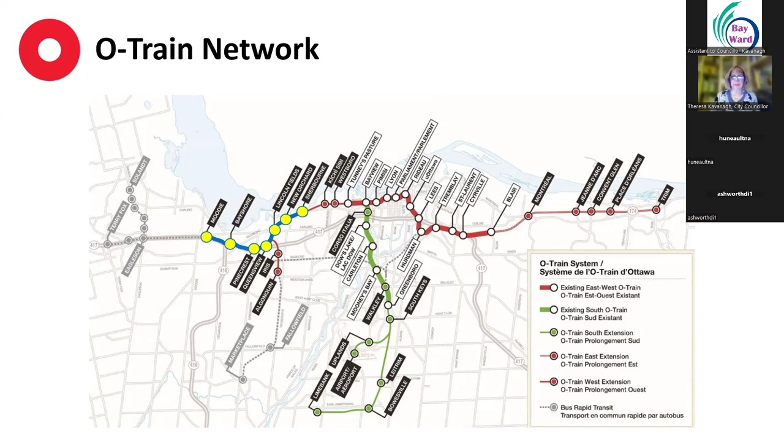Our agenda for this evening: we're going to go through a Ward 7 construction update. We have some new photos as well as some update notes with regards to station construction. We'll touch on the Highway 417 westbound on-ramp closure at Pinecrest, the 75 Cleary deep utility works, Kichi Zībī Mīkan work, the Richmond Cut and Cover Tunnel, as well as the Richmond Complete Streets project. And at the end, we will also have a slide again with that contact email.

Right now, our LRT station construction will continue in Ward 7 throughout 2024, with some stations nearing completion by the end of the year, which is very exciting.

The light maintenance and storage facility is about 99% complete. Moodie Station is at 86%, Bayshore at 57%, Pinecrest at 92%, Queensview Station 74%, Lincoln Fields 95%, New Orchard Station at 45%, and Sherbourne Station at 38%. So we're coming to completion on a few of those stations. I'm sure all of you living around the areas have been able to see that work taking place and coming to a close.

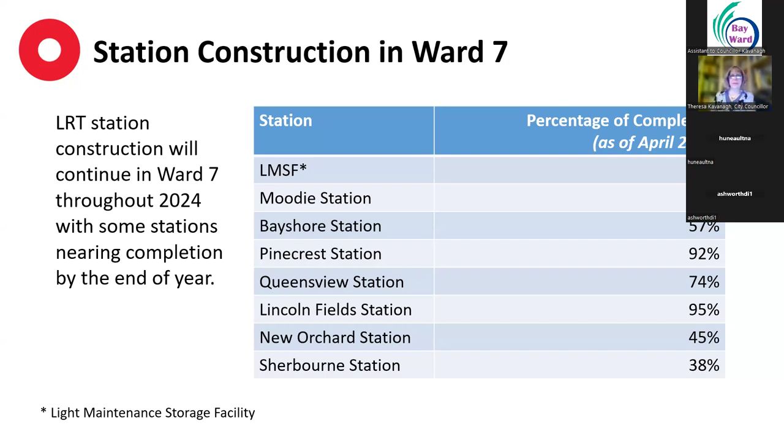For our light maintenance and storage facility, testing and commissioning of the building at the LMSF is in progress.

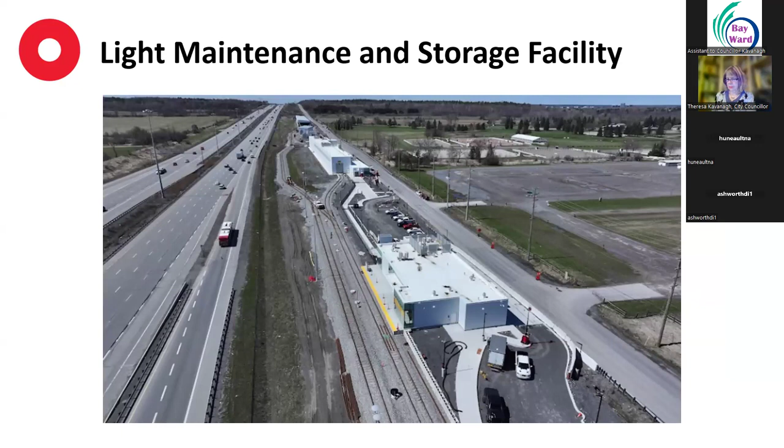For Moodie Station, the mechanical and electrical finishes, room finishes, elevator installation, concourse and ceiling installation is still ongoing, but there's definitely been some great progress.

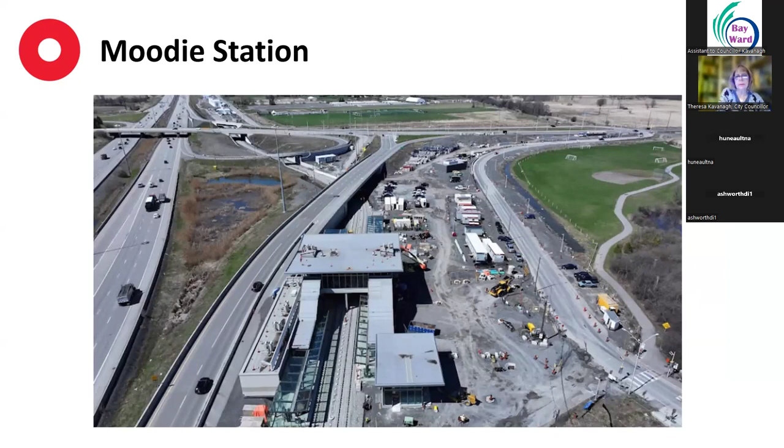For Bayshore Station, we have construction of the foundation wall at the center station building, concrete foundation work at the South Station building is currently ongoing. Framing and insulation installation for the northeast concourse rooms is nearing completion, and work on the pedestrian tunnel continues.

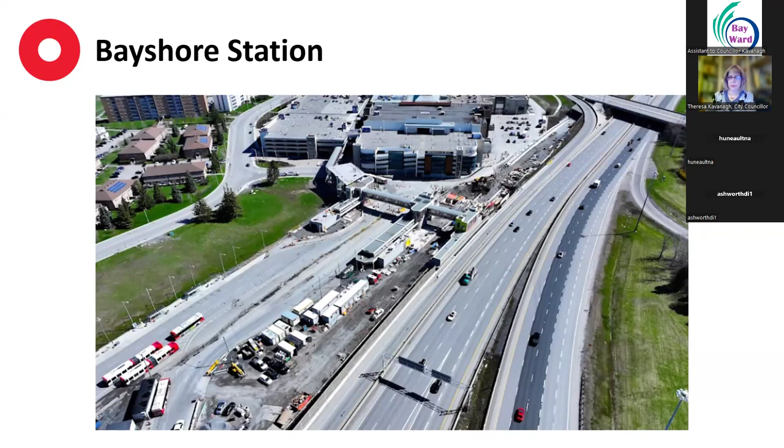For Pinecrest Station, the elevator shroud installation is taking place, signage installation, service riser installation, as well as mechanical and electrical finishing work is ongoing.

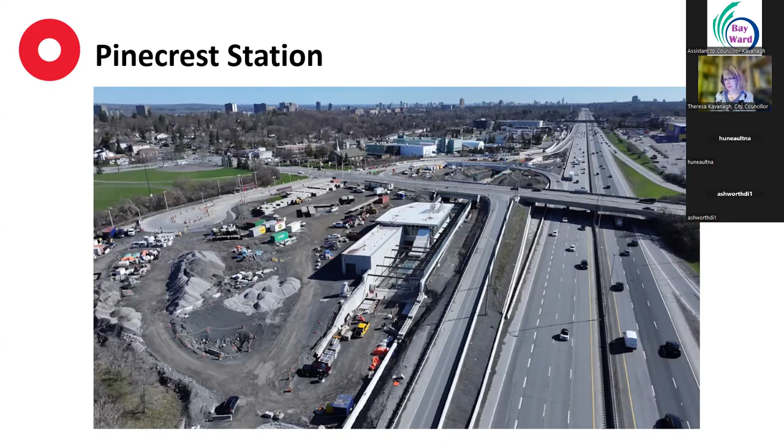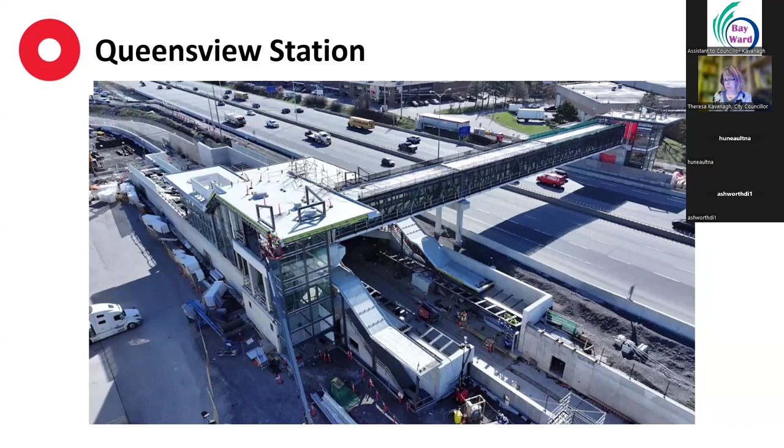At Queensview Station, installation of insulation and drywall at the Queensview Station North building, along with construction of the exterior walls, continues. The concourse glazing is ongoing, and curtain wall support installation and mechanical and electrical finishes for Queensview Pedestrian Bridge is continuing.

At Lincoln Fields Station, interior finishes at the platform level and signage installation continue. Electrical panel installation along with installation of handrails at the end of the platform stairwell is complete.

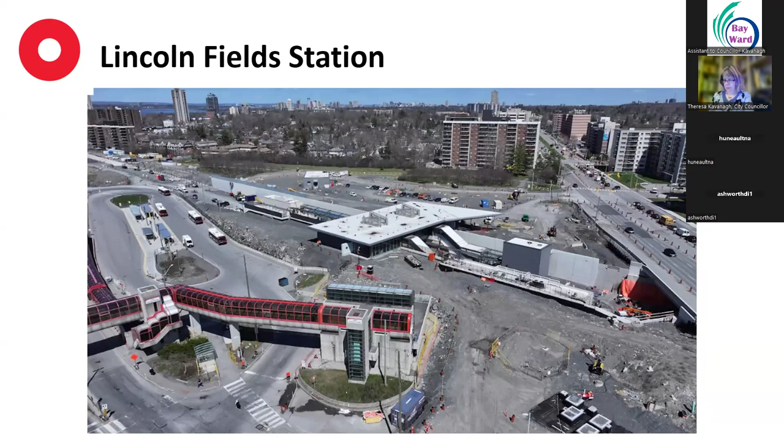For New Orchard Station, structural steel erection for the East Concourse is complete, and is underway for the West Concourse. Work on the West Concourse roof has started.

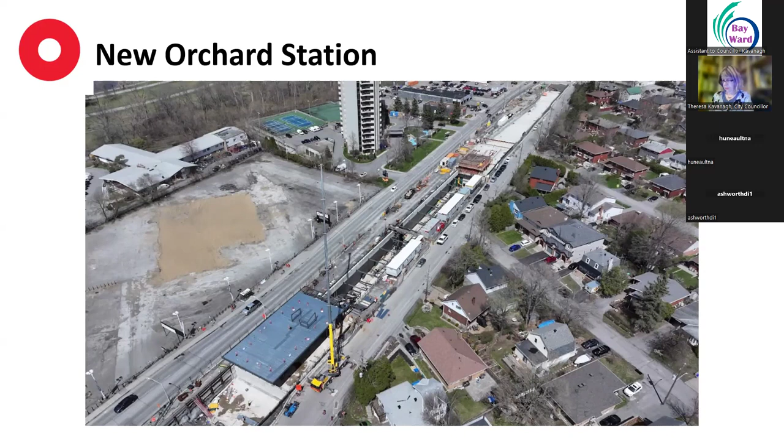For Sherbourne Station, concrete work for the West Station and East Station platform walls is now complete, and work on the stairwells and concourse slabs continues.

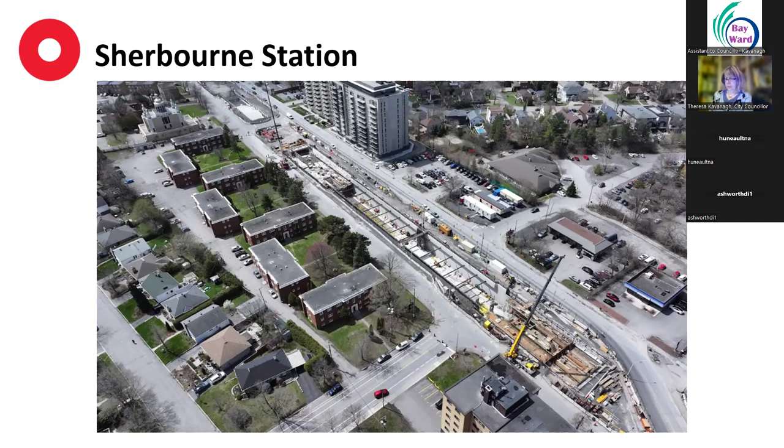Just to make note, for all the photos presented, those were taken in April of 2024. So they are a fairly recent look at work that is ongoing and the status of the stations. However, reminding that it is May, some work might be a little bit more complete than when these photos were taken.

Now we're going to touch on the Highway 417 westbound on-ramp closure at Pinecrest. To complete construction of the permanent roadworks and the segment of the LRT guideway at Pinecrest Road, the westbound Highway 417 on-ramp from northbound Pinecrest Road, which closed on Monday, May 13th, is expected to reopen in early August. Once completed, the northwest ramp may be closed temporarily, and a public notice will be distributed in advance of that temporary closure.

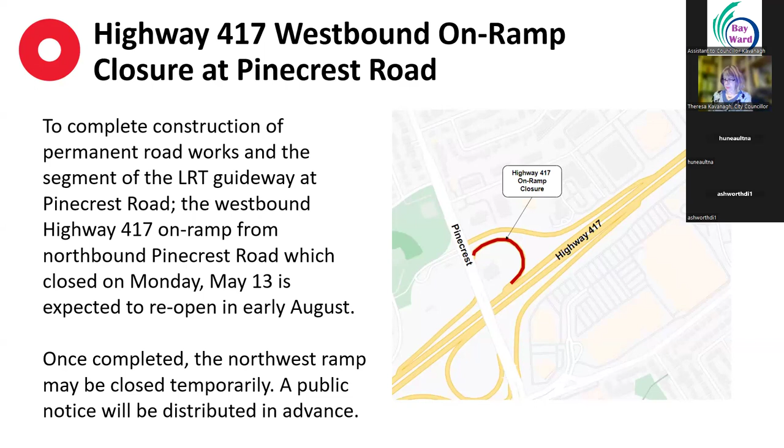For 75 Cleary, the deep utility works from May to fall 2024: utility work to the east of 75 Cleary Avenue involving deep excavation, replacement of water main, storm and sanitary sewer infrastructure will take place. As early as October 2024, the temporary detour through the old Kristy's restaurant parking lot will permanently close. Just to note, in the picture, the highlighted box shows the area requiring those deep utility works.

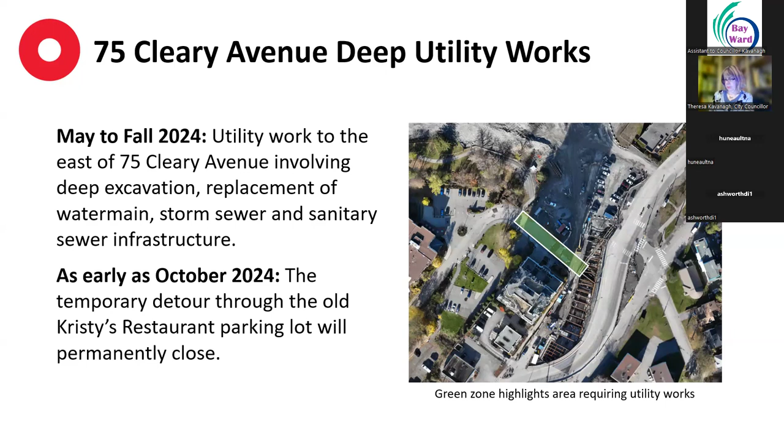The Kichi Zìbì Mìkan, so in May and June, there will be backfilling of the tunnel along the KZM. For 2024 and 2025, construction of the permanent configuration of the KZM will be taking place. And this summer, 2024, construction of the Cleary pedestrian underpass will be continuing.

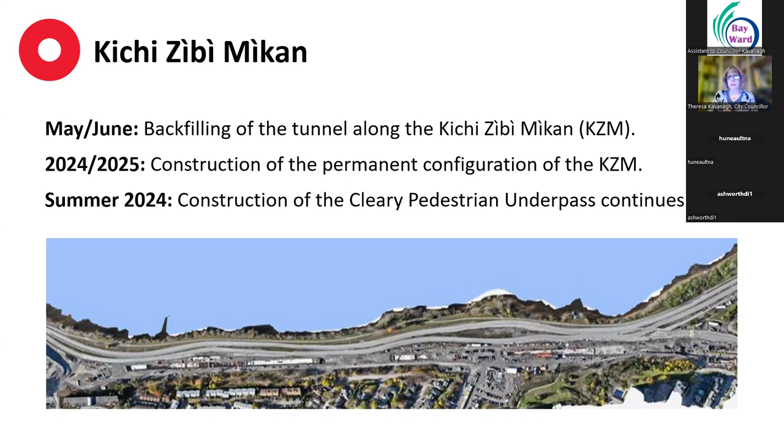For the Richmond Byron cut and cover tunnel, we're looking ahead to June 2024, which is shockingly only in a few days. Tunnel construction along Richmond and Byron will near completion, and once completed, tunnel backfilling will commence.

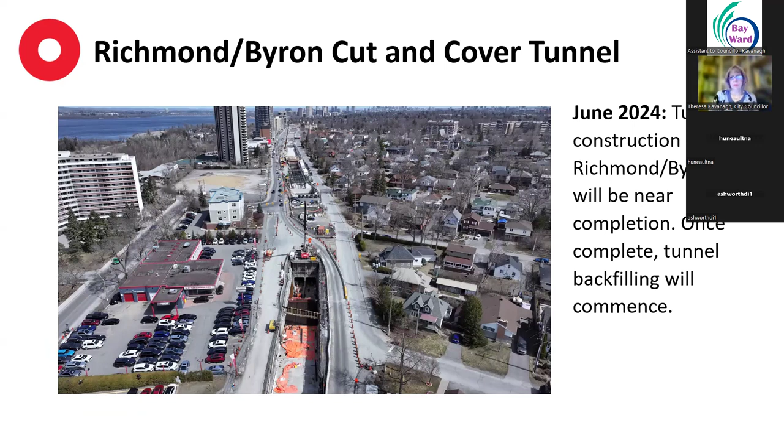Touching on the Richmond Road Complete Streets project, preliminary work is expected to begin this year between the east side of the bridge over the KZM and just west of Cleary Avenue. The multi-year project will involve backfilling of the LRT tunnel in the area, final paving of Richmond Road and Byron Avenue, construction of curbs, sidewalks, bus platforms and shelters, raised pedestrian crossings, segregated bike lanes, installation of street lighting, traffic signals and signage, tree planting, landscaping, and property reinstatement.

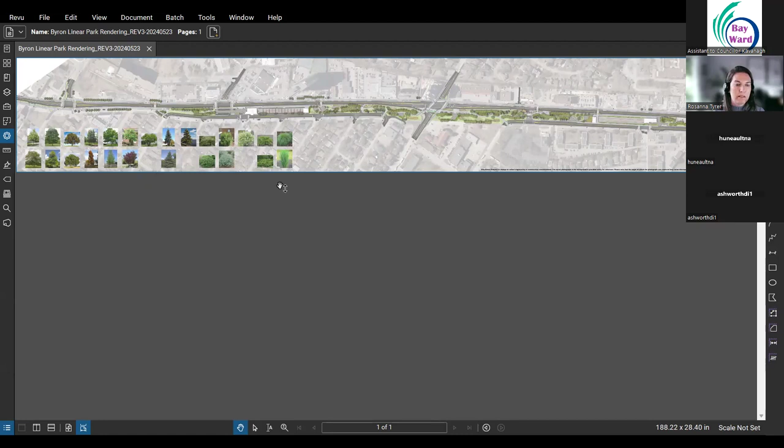In addition, you can't really see it on my screen, but there is a little disclaimer. I will note that this is overlaid on an aerial. The way in which aerials are taken, sometimes they're taken at an angle from above. So you may notice things, for example, here where it looks like a driveway doesn't quite line up with the existing driveway. I can assure you that this driveway will, on site, line up properly. So just keep that in mind when you're looking at whether or not some of these edges line up exactly with what you see underneath. It's more or less just to help reference where everybody is.

So to start, I'm going to start backwards. Essentially, I'm going to go west to east. So throughout the entire corridor, we're going to have separated cycle facilities and sidewalks. If I zoom right in here, you can see the sidewalks are denoted with this gray-like hatching, whereas the cycle facilities are between the road and the sidewalks, denoted by the cycling nomenclature pavement markings.

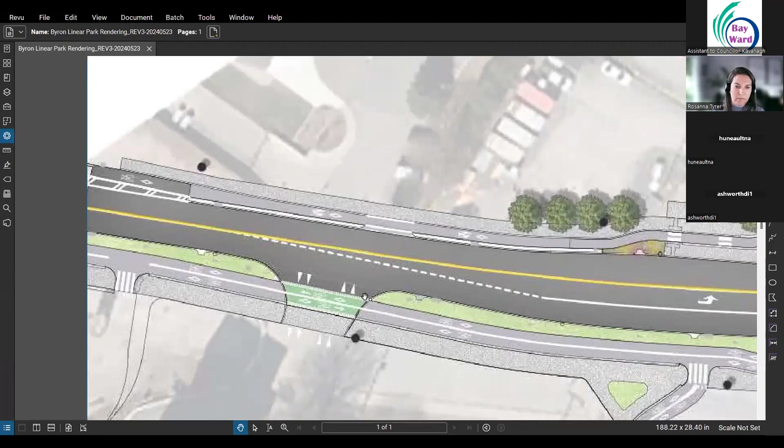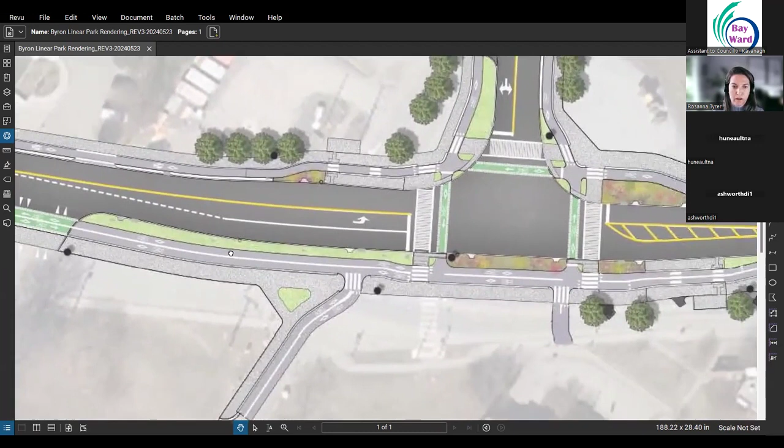Right here we will have the access to the Lincoln Fields area, the MUP that goes into there. We have our 1190 friends with their new aligned access, as well as the 1195 on top, their access will be reinstated to Richmond Road. You can see here we get to Edgeworth. Edgeworth will remain closed and have a tie-in for both pedestrian and cycling facilities.

At McEwen itself, the final alignment will be pretty much in between where it was a few weeks ago and where it is now. So we are in the process of getting all the underground infrastructure in for that. The cycling and pedestrian facilities will tie into the existing, as well as the cycle facilities will have an on and off road transition between McEwen.

So at the intersection, you can see that the cycling facilities will have its own dedicated crossing, as well as the pedestrians. We will be having bus stops with bus pads at various locations throughout this project. For this particular intersection, you'll have one on the far side, on the northwest corner, and then one on the southeast corner for the opposite direction.

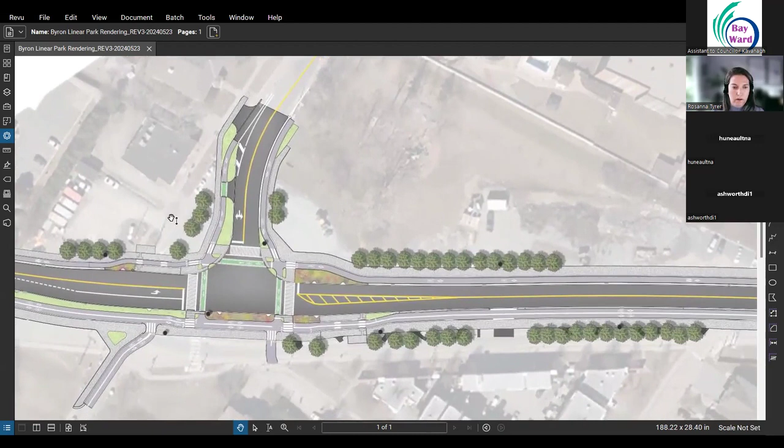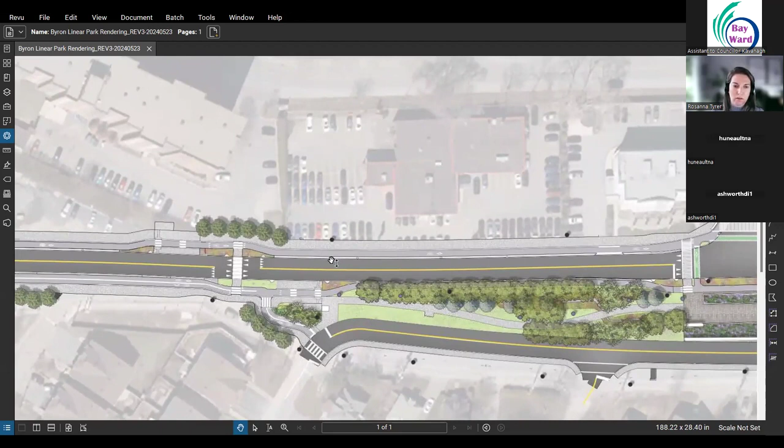As you can see through this area, we have some driveways and then the tree reinstatement along the way. Once we get past, this is one of the Ambleside apartment complexes and the used car dealership. There will be a raised pedestrian crossing, which we've had in the past.

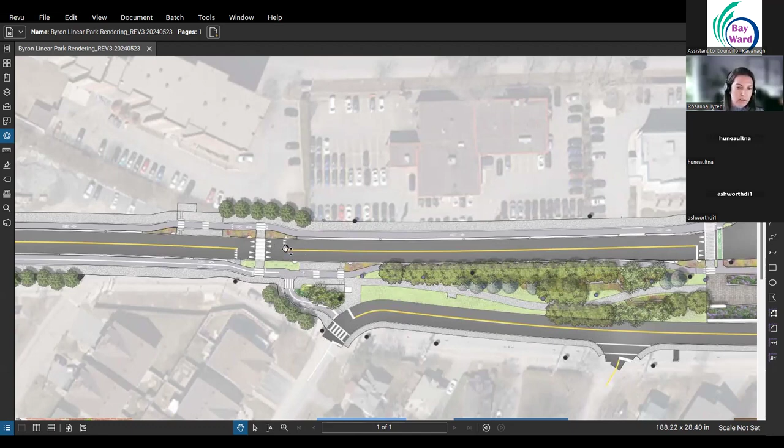I want to bring attention to these, we call them shark teeth. These little triangular pavement markings denote a raised crossing. You will see that at a few of the intersections as well as some of the raised crossings through here. So at Hartley, the crossing will be raised.

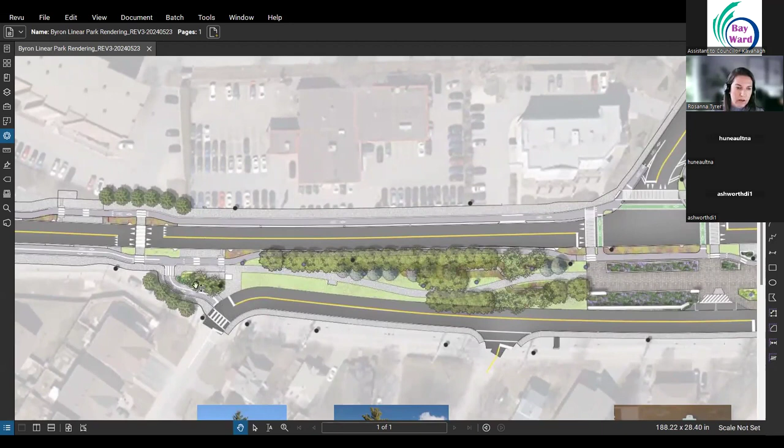The other big change to this area is that the connection from Richmond to Richardson is being removed. There will be facilities to take people to Richardson Byron to get them down onto that road. Otherwise, they can continue on through to the station. So this intersection is...

the New Orchard intersection along with New Orchard Station. We will be reinstating the road up New Orchard. We'll be doing the same form of treatment, much like McEwen, where the sidewalks will be attached and the cycling facilities will have the on and off street transitions. It will also have the same treatments for crossings.

The one thing I am going to note for this, once again, we have the shark teeth at this intersection. That is because New Orchard Station will be raised. So this whole intersection, when you come to it, will have you go up and over. It will also be a paver stone intersection, so that between the raised area and the different type of material will have a traffic calming effect.

So on the south leg of this intersection is where the courtyard for the station begins. There will be some on-street bus facilities to capture the local residents coming in and out of the station. There will be all-way stop and some one-way stops along Byron as we go past the station, and on the north side you have your pedestrian and cycling facilities to carry on past.

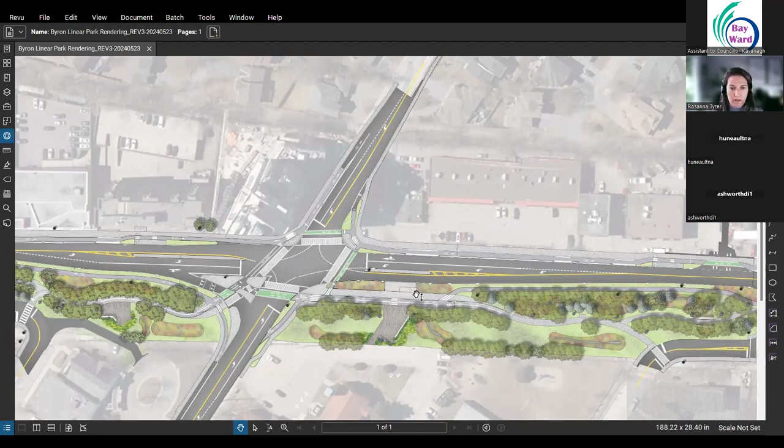When we get to the intersection of Woodroffe and Richmond, again we still have the pedestrian and cycling facilities in their segregated crossings, as well as the north and south legs of Woodroffe having the on-off transitions between the cycling facilities. We have some of the bus stops on either side, pretty close to where they are now.

And then moving further to the east, we move into the Lockhart transition. Similar to both Richardson and Richmond, and Richardson and Byron and Compton, they will turn down with a pedestrian connection through it.

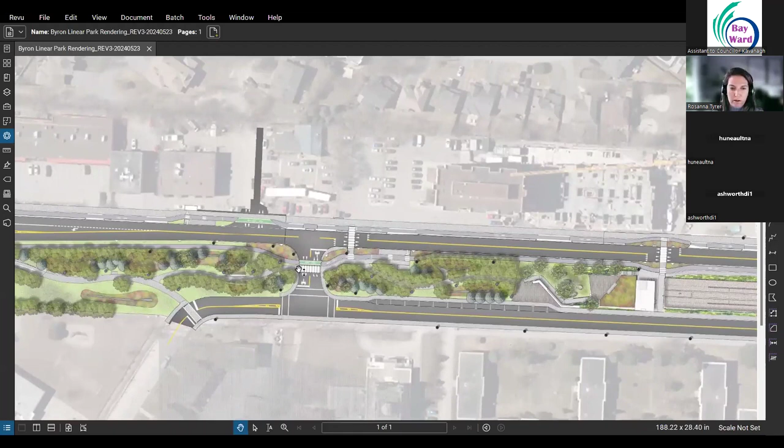We are now here, this is the northern section of Lockhart with the Poolorama. There'll be a bus stop here as well on the other side with another raised crossing, and the crossings between Byron and Richmond will also be raised.

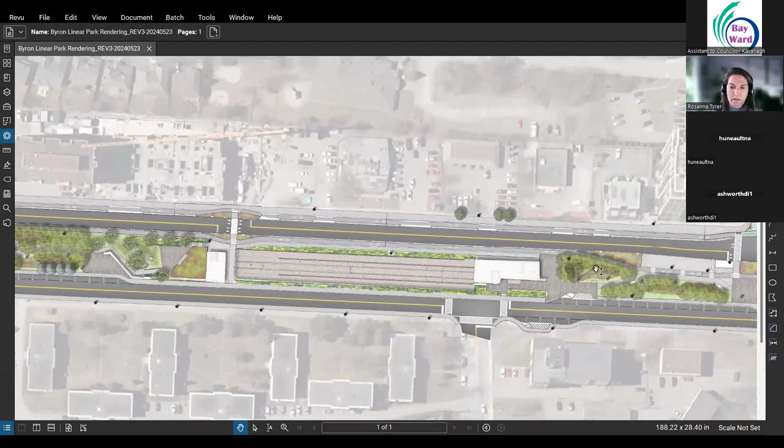As you move further east, this is when we start to get into the Sherbourne station. As you can see here on either side, it has the pavilions and facilities for bikes and pedestrians to move across it on the north side of the station, as well as some amenities on the south. So again, we have the controlled crossings on Byron.

Sherbourne does have the small kiss and ride on either side. These are not anticipated to have high volumes. This would be more or less you and your neighbors dropping off your loved ones on a rainy day kind of scenario, or picking up.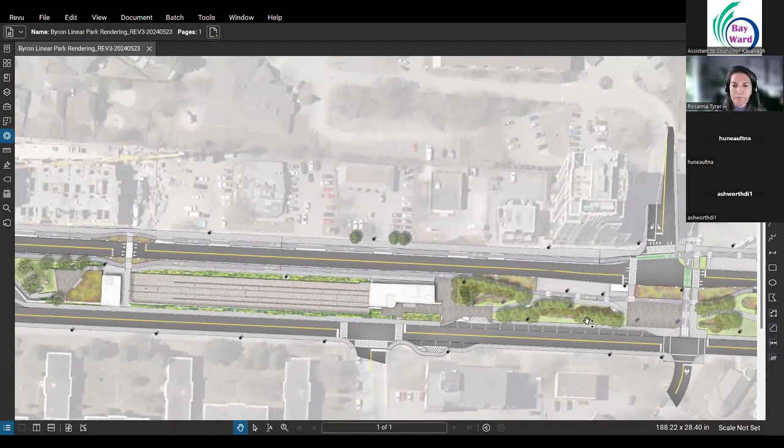So the last leg of this road plan is the Cleary intersection. Cleary intersection will be just like New Orchard, where it is raised, as you can see by the shark teeth, and it will also have the paverstone intersection, which will again add to the calming effect from the visual and vertical changes in the area.

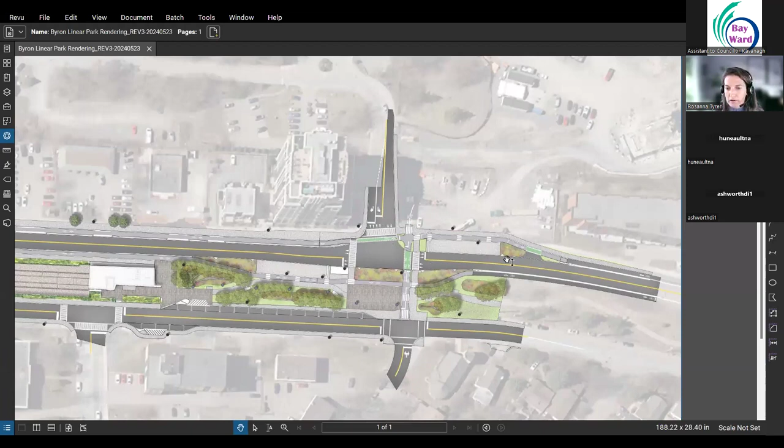We also have again your segregated crossings for the different modes of transportation and your two bus stops on either side. And then it'll continue on and tie into the existing street.

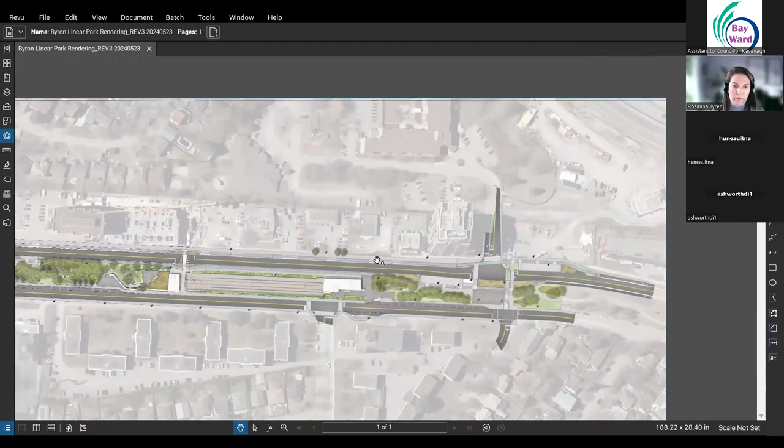I know that's a lot to digest, and these are very small pictures for now. They will be released so everybody can take a moment to check the areas of more particular importance to them. If you see something here, please send us an email through Stage 2. If you can use Clip It or give good directions on exactly what you're looking at, that'll help a long way. Otherwise, I'm always welcoming one-on-one video chats where I can sit and walk you through in a smaller group.

With that, I had the chat hidden, so I'm not sure what has popped up. Where did we go?

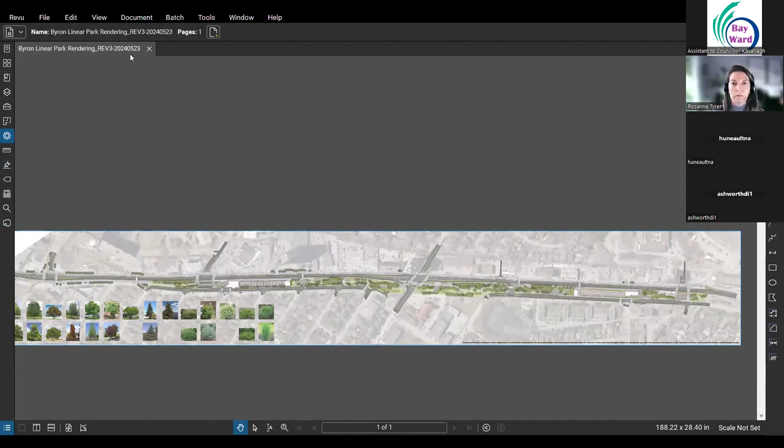Thanks, Rosanna. Yeah, it's a ton of stuff, but all very exciting. And I can tell you, I rode my bike home along that way, and I will look forward to having a separate cycle lane so that it's safe for everyone. Cars have their lane, cycles have their lane, pedestrians will have their space. So it's good stuff.

Is there another presentation, or are we ready for questions? We can get into some of the questions. Okay, thank you. I'll just go through what has been sent. We'll be reading questions, we don't read statements because we don't have time to read everything, but if there's a question, we'll pass it on.

Corey's asking about the sidewalk and multi-use pathway side by side. That is actually so that cyclists have space and pedestrians have their own space. And certainly I've heard a lot from people who don't like MUPs because they're sharing them with cyclists. So pedestrians still have sidewalks, and I think that's going to be a good thing. We encourage cyclists to use the pathway designed specifically for cyclists.